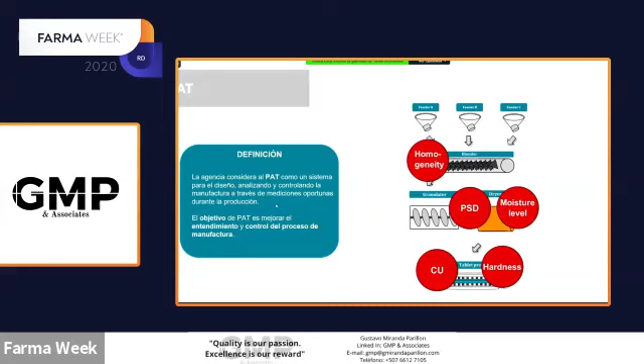So per definition, every single measurement you perform during your process that gives you information about your process and helps you understand it and ensure quality is a PAT measurement. Actually, a simple compression force measurement in a tablet press is already a PAT measurement. It might be an old-fashioned one, but it's a PAT measurement. So PAT doesn't have to be a spectroscopic measurement, but sometimes people think PAT is equal to, for example, near-infrared spectroscopy. Of course, today I will talk about spectroscopy.

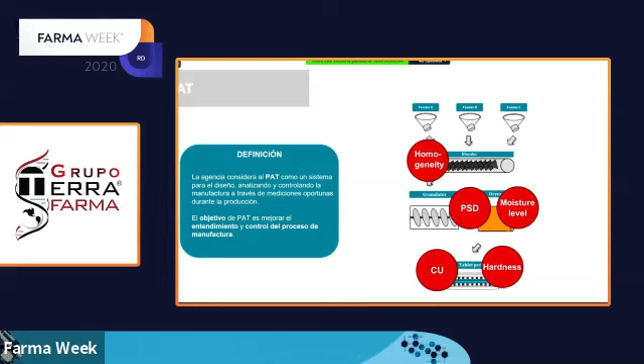On the right side, you see a scheme of, for example, a wet granulation continuous line, and there you see the possible PAT positions. Imagine a line where we have feeders continuously feeding powder into the blender. Then you might be interested in blend uniformity after the blender. When the powder falls into the granulator and is granulated, you might be able to measure particle size distribution.

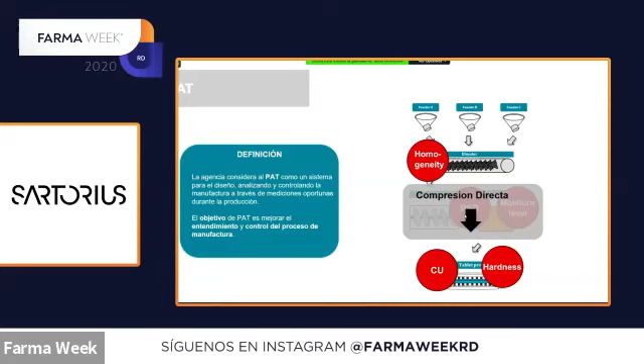Later on, when you dry the powder, you might be interested in the moisture level of this powder. Then the powder falls into the tablet press where you can measure the hardness and the content uniformity. If you would use direct compression, you would save some process steps and of course some PAT measurements, because if no process steps, no PAT measurements needed.

But before we start, I would like to give you some overview about why spectroscopy was actually the method that now starts to be implemented for the PAT methods.

Let's start the other way around. Let's define what are the most important points for a method which we want to apply in a process to measure fast and continuously. So the first thing is we should have a method where we do not need sample preparation. So you don't want to dilute the sample, just measure it like it is.

Then a second point would be that we don't want to have destructive methods, because you want to measure quite often, and if you would destroy your sample, then you cannot sell it. So it should be non-destructive at the end. And then it should be cheap, of course. We don't want to pay a lot.

And this method should give you the possibility to collect, to create some chemical information. So you want to know, for example, is it the right API? So the identification test in my sample, or is the API concentration okay? But on the other hand, it would be great if the same method could deliver you physical information, like, for example, hardness of the tablets. And of course, it has to be fast because we want to measure in a process.

And if we would now summarize all these requirements, the perfect answer to these requirements would be spectroscopy. And this is why PAT and spectroscopy are always so close together.

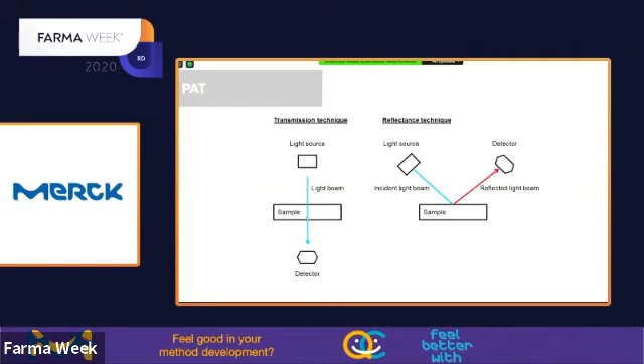Transmission technique is you have the light source and you have a detector and the light goes through the sample. So we measure quite a big section of a sample, but you can already see the light has to go through the sample. So if we are restricted in the thickness of the sample, for example, for tablets, the restriction would be somewhere around 9 up to 10 millimeters thickness for NIR spectroscopy. But we can measure quite low API concentration with this method.

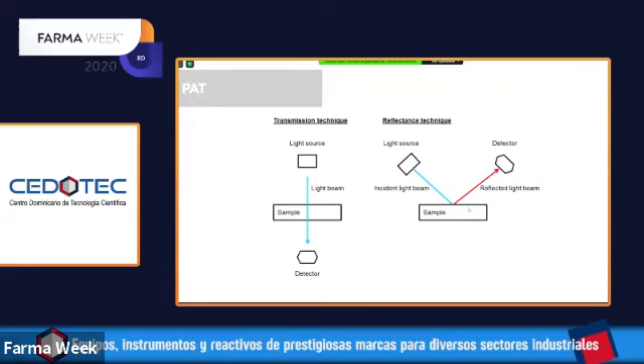The second method would be reflectance technique. Then the light beam and the detector are on the same side. So we are not restricted to the sample thickness anymore, but we measure only a small fraction of the sample. For most of the methods, we can only say it's only a surface method.

But this method is less critical to geometrical shapes. So if you maybe have convex tablets, or if you have a breaking line embossing, this method might be easier to apply. And this method is also better for moving samples. So you see, there's actually no single best method. It's always depending on what you're searching for and what problem you want to solve. Then either the one or the other method might be better for you.

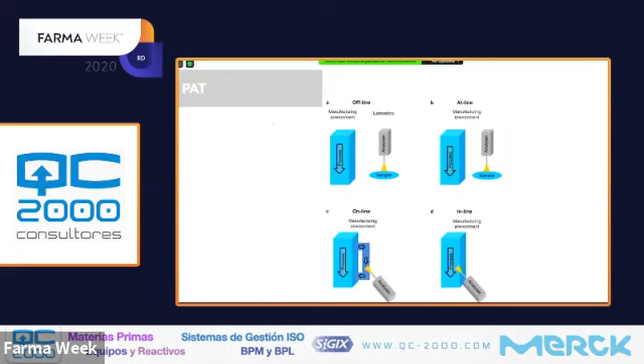So, the last topic from background and basics in PAT is also, when you talk to people, they like to use fancy words like offline measurement, inline, at-line, but not everybody uses them completely in the right way. So let's just be sure that we are all on the same page.

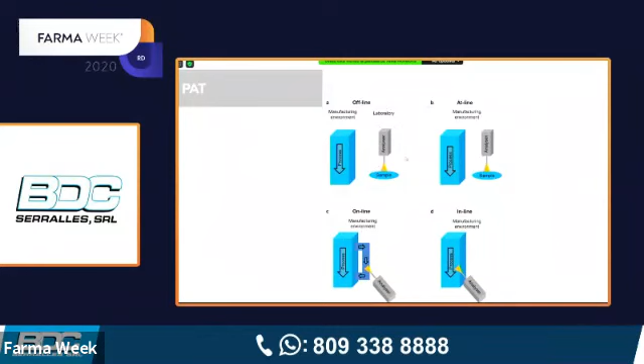Offline means that we have our process in one room, and then we have a separate room, for example a laboratory, where the analysis is performed. So these two processes are spatially separated. This is called offline. If your process and your analysis are in the same room, they don't have to be connected, but they can be, then it's called at-line analysis.

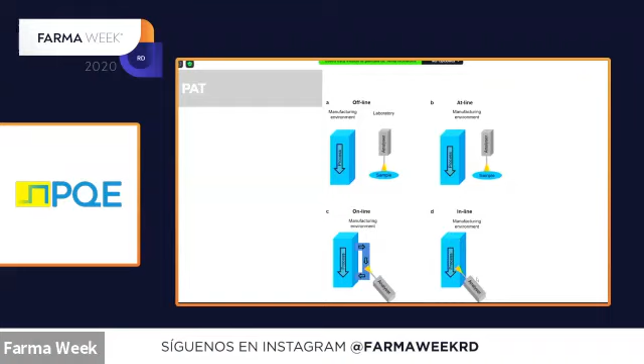Online analysis is when you have your process and then you have kind of a sampling loop where you withdraw the sample, pass the sample through the analyzer, and go back to the process. Then it's called online. And inline is when you have an analyzer directly in your process, so you're not taking the samples out of the process.

Before I introduce our PAT projects, I would like to show you our continuous manufacturing line, because this is the line I'm working with and where we perform most of our trials, so you can better understand the setup. Before we go into this line, I would like to present why continuous manufacturing is now starting to get more and more interesting, mainly because of the motivators and drivers I would like to present now.

First of all, it's time to market. You can save time during the process development phase, because in a continuous line, you can vary the parameters. You can change the blending parameter and directly see what is the influence on the tableting. So you save time, you are more flexible.

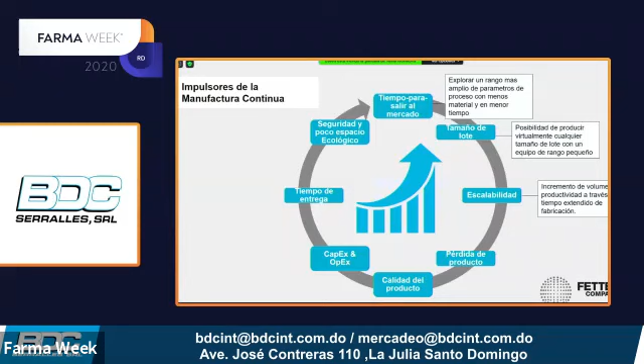The second point would be batch size. You are not restricted to some equipment size anymore, like in a batch production, where you have one big blender and if you want to produce a smaller batch, you need a smaller blender. You just keep it like that, and if you want a bigger batch, you just run for longer, maybe 20 or 30 minutes longer. Then, the scale-up process: you develop the process on the same line, and you can also produce later on the same line. So the scale-up process that you normally have in batch equipment, when you start with a smaller tablet press and have to scale up to a bigger tablet press, may disappear. This can save you up to 6 months.

The next point is, of course, product losses, because a continuous line can run for quite some long time. The only points where you can lose product are during the startup phase and stop phase. But you use the same powder during the startup for all the unit ops, so you would save product, and when the line is in steady state, it is running normally.

Additionally, your quality can increase, because you can control your process in much tighter limits than in batch production. If something is wrong, you can still adjust the process and go back into the tighter limits, and therefore your product quality, due to PAT and maybe advanced predictive control, so-called APC, might be much higher.

Then, of course, your CapEx and OpEx costs might be reduced, because you don't need to buy more equipment anymore. You don't need to buy several blenders to be flexible in batch size. You just buy one line and try to realize all your capabilities with it. Because you don't have the intermediate product in between, you don't need place to store it, so you can save storage space.

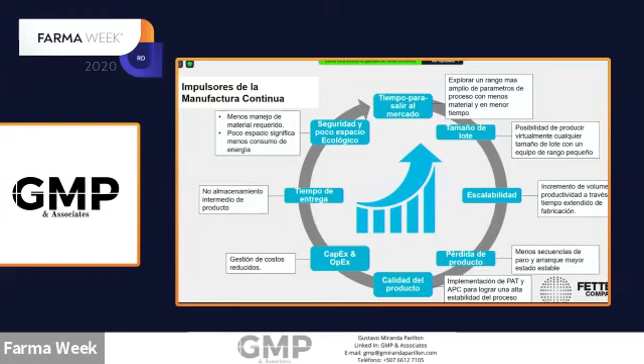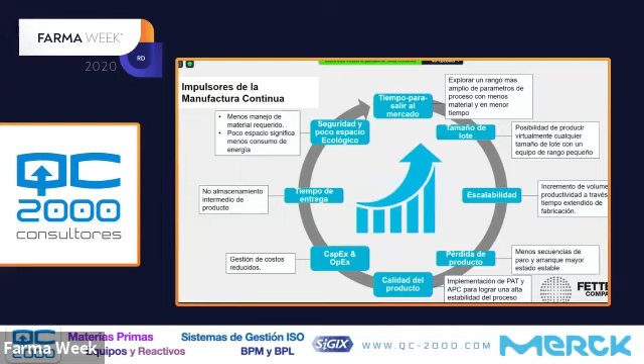Additionally, there's the so-called safety and ecological footprint for the operators — they have much less contact with powders, so it's safer for them. These continuous lines are also quite small compared to huge batch production halls, so you really save footprint. And because it's smaller equipment, you need less energy and less water to clean it, so your ecological footprint might also be smaller with a continuous line.

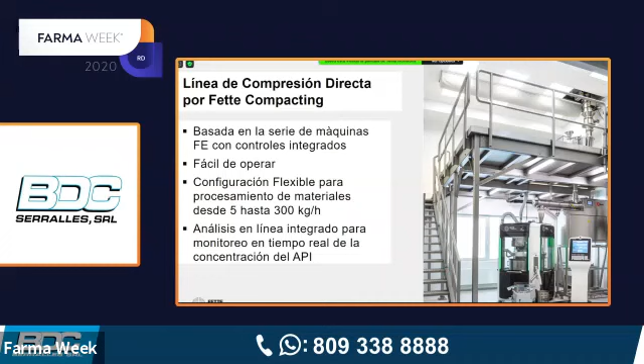Now this is our continuous line from our testing facility in Schwarzenbek, Germany, and that's a high throughput line. What you see in the picture — we also have different lines, but this setup is for high throughput — has a two-level concept where we have the raw material charging, then the feeders on the second level, which we'll also see a bit better in a video I'll show you soon. Then the powder falls into the blender, and after it's blended, it goes into the tablet press, is tableted, and goes to peripheral equipment.

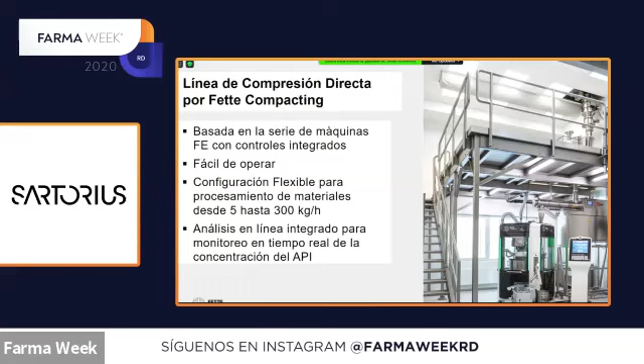This continuous line is completely built on a FETTE controller, so the operator who is operating a FETTE tablet press knows how to operate the continuous line, because there is the same logic behind it, and therefore it's easy to operate. This line can run from 5 to 300 kgs per hour — you will see today case studies for the whole range. And we have several PAT techniques on this line to monitor the API concentration.

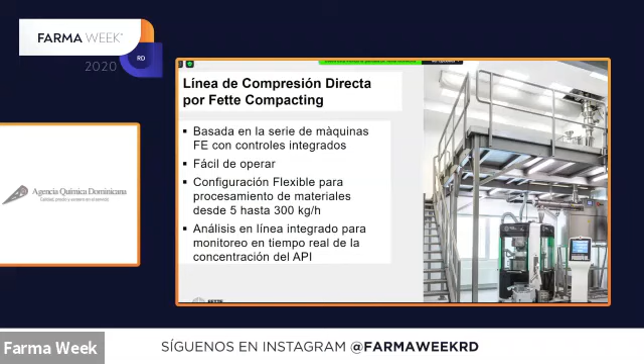Now I would say, let's start with the fun — let's really look into the PAT techniques. What I want to present you today is not a FETTE PAT portfolio, no. It's what we are doing in research at the moment. These are the projects that we are realizing together with customers; some of them are already realized, some of these projects we're still working on with the customers.

We don't have a complete solution for PAT problems, but I want to share our experience, because we've collected some experience, and maybe we can have an interesting discussion. What is your point of view on several implementation positions?

Yes, and since we're at FETTE, the implementation positions are mostly located in a tablet press. It's not only a continuous technology, so you can apply them in the same way in a tablet press.

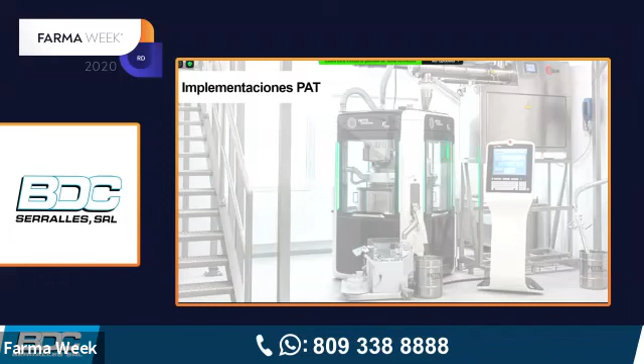But I'd suggest we just follow the powder stream. We see our blender in the background, and then the powder falls into the tablet press. Let's follow the powder stream. Now the first powder arrives at the tablet press, and it arrives at the infeed tube.

There you can see we are directly below the powder level, and here the powder is moving slowly. So this position is quite good for slow measurement techniques. You can of course apply near infrared spectroscopy, but sometimes you may want to apply Raman spectroscopy.

Raman spectroscopy might be more precise, so you might be able to measure lower API concentration. This position might be good for the Raman technique. This is also a sensor you can see in the picture, but it might also be suitable for laser-induced fluorescence.

We've already had discussions with our customers and also tested several spectroscopic techniques in this position. We're sitting here directly underneath the powder level, so it's easy here to also monitor the blending process, because it's a really freshly prepared blend where you can see that.

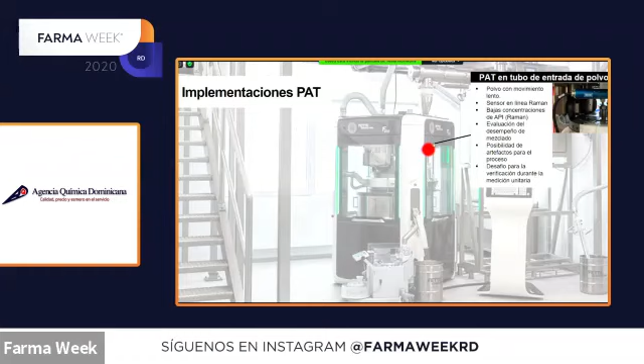If you get a bad measurement here, you always have the question of what to do with it. Of course you can reject the powder, but then you need so-called residence time distribution models, or RTD models. You need a model to know when this powder comes out as a tablet.

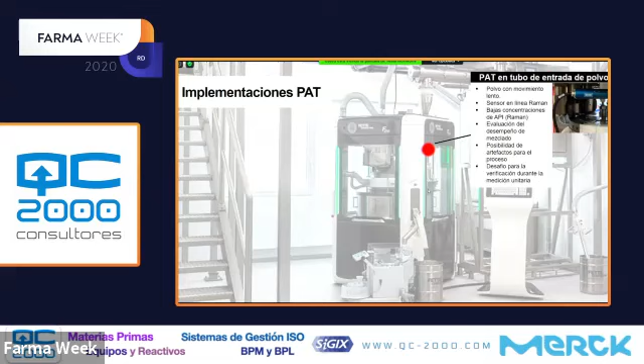But of course you can have some kind of diverter. There are also some companies measuring directly after the blender, before the tablet press. But we don't believe in this philosophy, because in a continuous line you don't want to stop the tablet press. The tablet press should run, actually the whole continuous line should run. If you stop one of the units, you might already be a bit out of steady state.

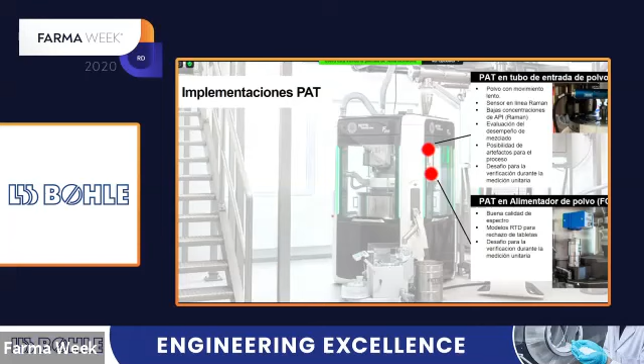Now if we follow the powder, we are in our feed frame, the Fillomatic, which is our 3-chamber Fillomatic. Now you can see we are in the second chamber, in a filling chamber. There you see an NIR sensor, which is measuring directly in contact with powder, and this is the powder falling into the die afterwards.

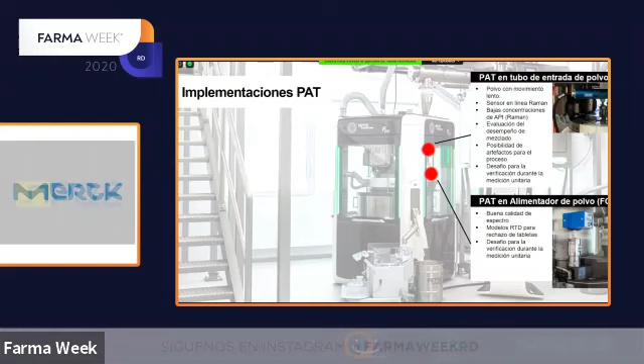In this position we have really great spectroscopic quality. We haven't experienced any sticking of the product to the sensor. You have the same, I'd say not an issue but a challenge, as with the position above: if you have a bad measurement, you need RTD models, residence time distribution models, to be

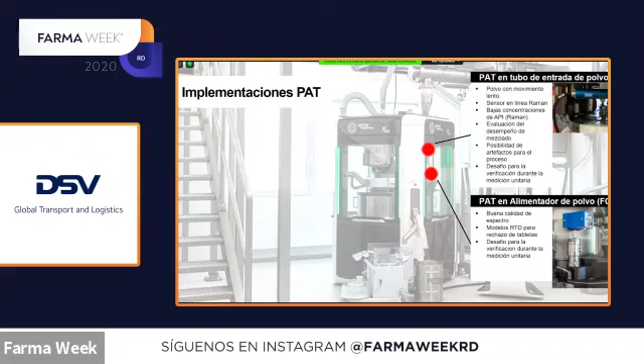able to know when this powder is in a tablet, in order to reject it, and also to verify this measurement. If you have a bad measurement, which might be due to spectroscopic issues, like air in front, an air bubble, anyhow, you would never be able to collect exactly this powder and measure that.

Now we're getting further. The powder was compressed, and now the upper punches are going up, and the tablet is still in the die. Before the tablet gets ejected, there is a sensor that sits above the tablet. You have to understand that the tablet press is actually a perfect sampling device for PAT, because it presents a tablet always exactly in the same way, at the same distance to the sensor.

The tablets have the same hardness, so the samples have the same hardness. Therefore, in this position we have a really good signal to noise ratio, and we can do 100% measurement control, measuring every single tablet.

And if the tablet is bad, we can reject it. So we can do single tablet rejection, take this particular tablet and go into the lab to do maybe a verification HPLC analysis. We can really align this reference analysis value with our spectra, because we know exactly which single spectrum belongs to each tablet.

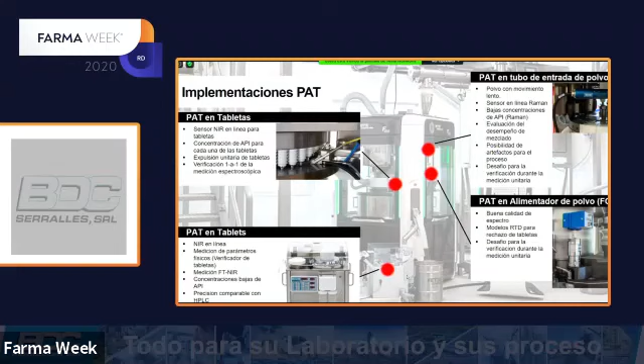And the last position is now the tablets are out of the tablet press, and they're falling into the NIR Checkmaster. The NIR Checkmaster is now really a product of FETTE, so this one you can buy.

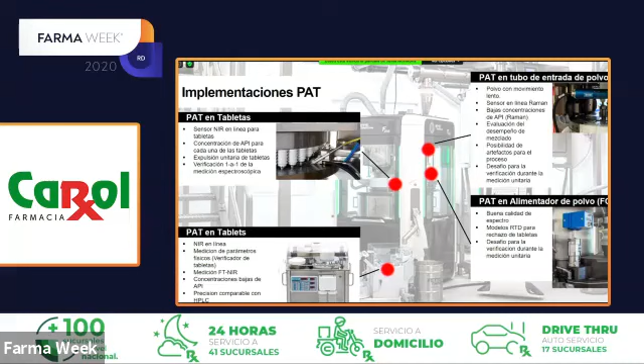The NIR Checkmaster is a tablet tester where you can check all the physical parameters, like what you know from a tablet tester: diameter, hardness, length, breaking strength, and also the thickness of a tablet. But it also has an additional NIR device.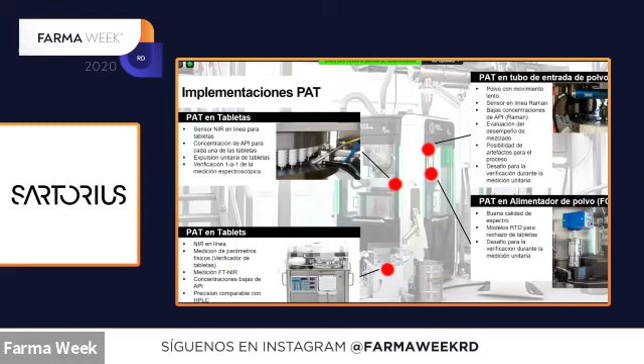I will show you that a bit more extensively on some slides later. And this NIR device is really precise, because here now we have time. We are not so time critical like in the positions I showed you before, because the longest measurement here is always a hardness measurement, so we can take time. Therefore, an FT-NIR is installed in this position.

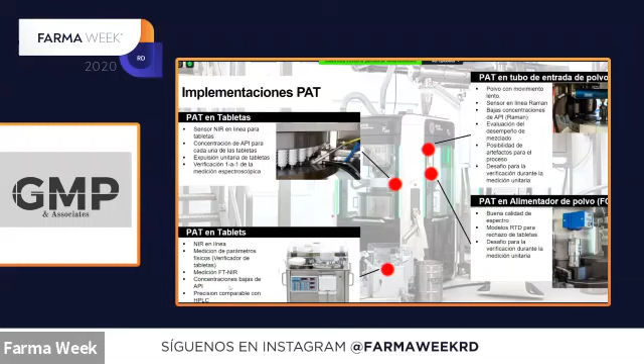This is a quite precise NIR device, which allows us to measure really low API concentrations. I will show you a study later on. A company, not even ourselves, measured this and said that this device can achieve the same accuracy as HPLC, because we have a hardness measurement, tablet weight measurement, and also API concentration measurement due to NIR.

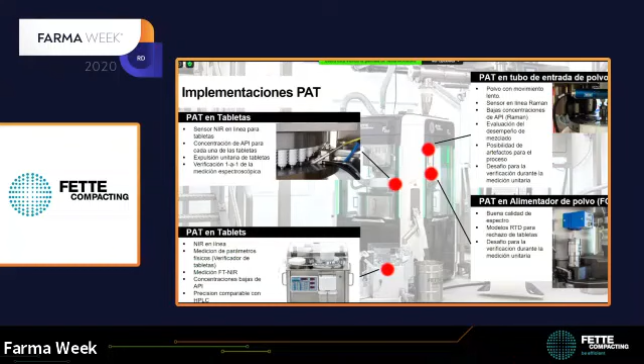We can measure content uniformity, and we also consider this device the easiest device to start with real-time release, if for example our customers are not really into PAT yet, because this device is already fully integrated into FETTE systems. So you will not get a scary spectroscopic screen in production, though you would in a development mode. The operator just operates a FETTE tablet press and operates an NIR Checkmaster through the FETTE software. It's easy and robust.

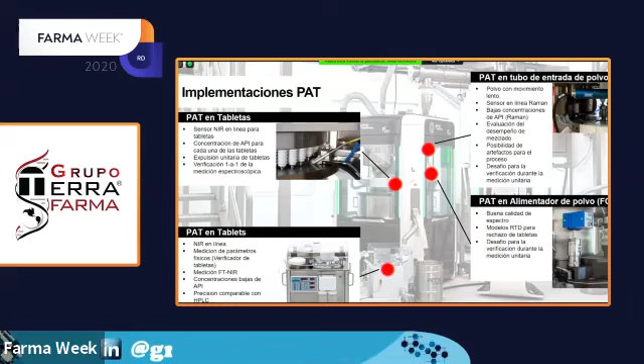So in the next step, I would like to show you a video of our continuous line. I just would like to show you the video because there you can see some of those PAT tools in action, and I think that might help make it more interactive since I cannot show it to you in person. So let's start with the video.

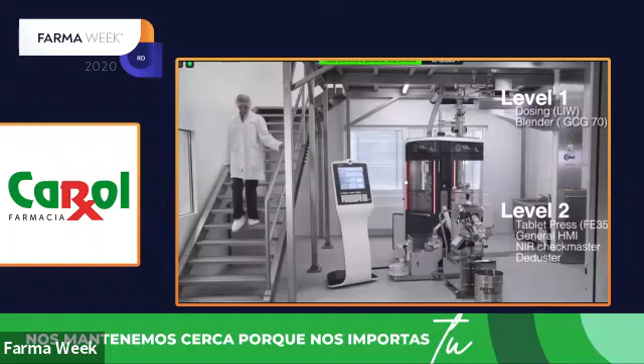Yeah, it's running. So it's our direct compression line, it's our testing facility. It's actually me several years ago. And this is a two-level technique.

This is now, you see, our HMI for this line. It's an older one, so I think it's 2 or 3 years ago. Now it looks a bit more fancy, but all the things that you need are here. You have an HMI to run the feeders, blender, tablet press, and also the PAT tools. And if you like, you have access to all the parameters of every single component, so you can adjust the parameters really in detail.

So now you see the feeder level, and you will see now that the powders will be filled in. This is a level I was not able to show you on the picture before. You see there's one feeder, and you see the second feeder. So the powder is now moving and dosing into the blender, and now you see that the blender is also already running.

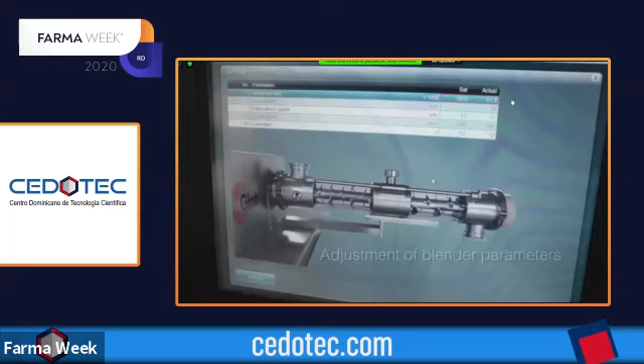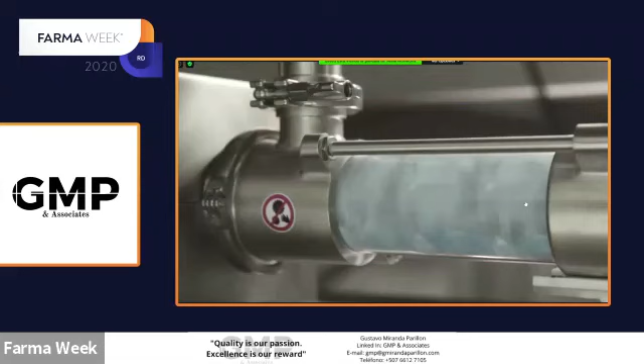Now you see the PAT tool, this is the first sensor. At that time point, we measured blend uniformity in the blender. But now, with our experience, I would not recommend you this position, because you will see in a minute there's a lot of things happening. So you see that the powder is blending.

So you can imagine this is an NIR spectrum. You can see the blend uniformity and follow the NIR spectrum. But you see that a lot of things are happening in front of the sensor, and therefore the spectra are really noisy, and the blend is not finished. There are still 1 or 2 screws in the blender later on where the blend is still being blended. So I would really recommend you to measure after the blender.

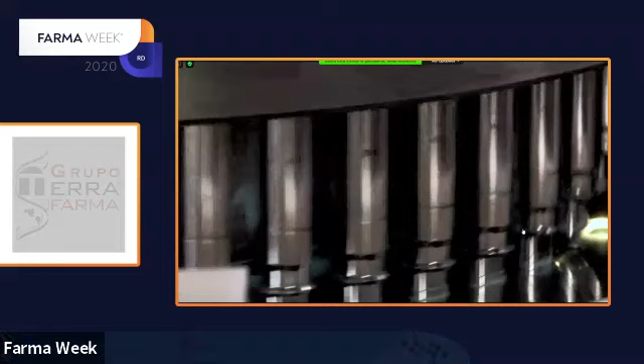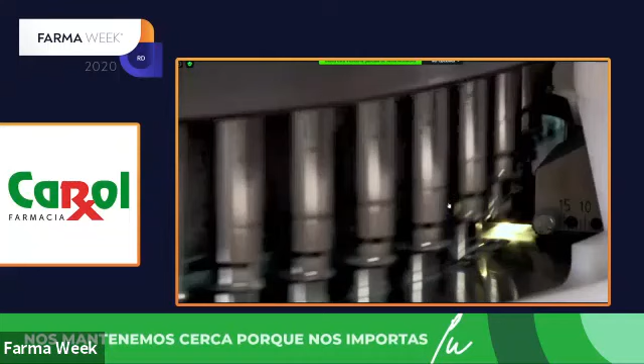Now we're already on a tablet press, and the tablets are already tableted. Now you see the NIR sensor, which sits between the tablets, and you see how fast the tablet press is running. Now I will just unmount the sensor, and you see that we also have some cleaning concept tubes. I'll explain that also later on. That's really important because we're in a dusty environment. If you would not have a cleaning concept, you will have a dirty sensor, which will show you nothing.

That's our old screen. Now it's a bit more fancy in FETTE colors, where you see that you get a dot for every single measurement, and then you see the edges. If you're in a green zone, then the operator knows that everything is okay. And if you're outside, then it's yellow and red at some point.

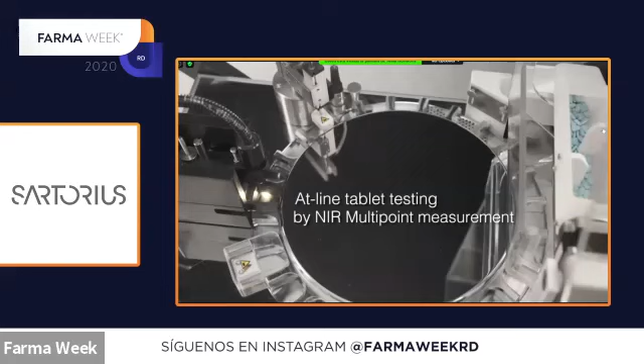And we also have an at-line tester, that's one of our NIR check masters. You see that there are some tablets now going into the tablet tester, and they're tested at single positions. And now you see the NIR measurement in position, how the sensor is moving and scanning the tablet for the measurement.

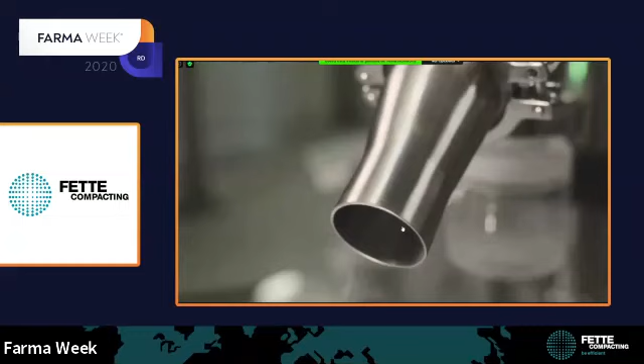So, as I said, I wanted to show you this video just to show you some of the NIR positions and maybe make it a bit more interactive, so you have a better feeling for what I'm talking about today. So this is just the video. I will wait for 10 seconds and you will see a beautiful FETTE logo and produced tablets.

No FETTE logo. Just let's go to the next slide.

Now when we have discussions with our customers, we talk to customers who are at different stages of PAT. Some of them already know what to do, they don't need us, they just want to buy a unit and do everything on their own. And then we have a lot of customers who are new to PAT and they are searching for a strong collaboration partner. With these customers, we always tell them that you should not expect too much from PAT from the beginning. That's why this talk is called The Road to Real-Time Release.

We always recommend to start slow, because PAT might be a new device for you. The first step would actually be process understanding and trust in your quality, because you have never measured your process so frequently. So you actually don't know what's going on in your process, and now, surprise, you may have some variations you never expected. So take your time to learn and to trust your PAT and also to trust your process.

Then the second step would be, okay, now you're trusting your process, you're trusting your PAT tools, start with process optimization. So start maybe to react on the process, or to stop your process if you see the batch is bad, and maybe you have to reblend, whatever.

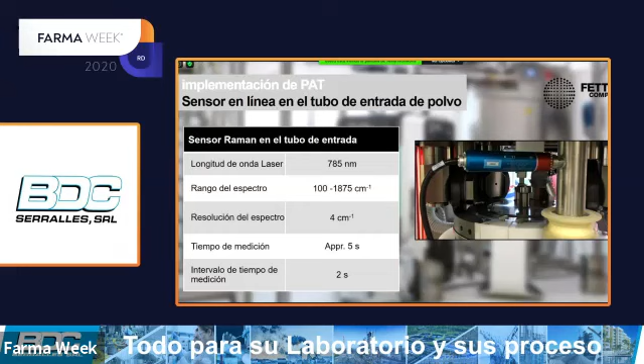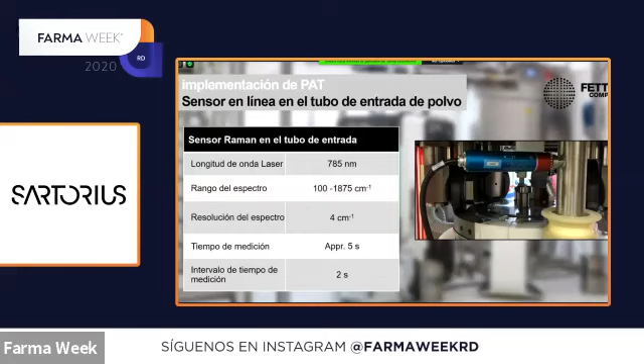When I'm talking about low concentration, I think I will repeat it several times today, but normally you say that NIR works until 1% in a process. But I would say actually it works only up to 5%. So above 5%, I'm quite sure, if you don't have a quite fancy API, it will work. But if it's between 5 and 1%, I would always recommend to test, to do some feasibility studies. And below 1%, most probably in a process, no chance.

But with Raman, you can go much, much lower. I will present you a study in a second for low API concentration. And here you see some technical data.

Let's just focus on the most important points. This is quite a slow method, we need 5 seconds per measurement. Of course it's completely product dependent and also supplier dependent, so it might be faster or slower depending on your Raman supplier. Then the sensor needs 2 seconds until it can perform the next measurement, so that's for you to know how often you can measure.

In this case study, I will always present you what the setup was. Here we have a target API concentration of 0.3% to do the calibration model. Quite often when performing feasibility studies with a customer, we have blends of different concentrations, and we measure them on our continuous line together with our PAT tools and with the customer. Then we create a calibration model, put it on the continuous line, and start to play by varying different parameters to see if we are capable with PAT to really see differences and variations in the process. First, I would like to present you a model.

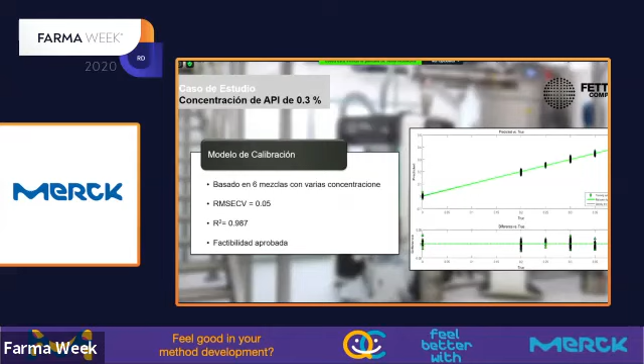To be able to use PAT, you always have to train the sensor. You have to say to the sensor that the spectrum, for example, belongs to 10% of API. So you have to have calibration blends with different API concentrations, collect the spectra, verify the measurement by maybe HPLC, or if you do it quick and dirty, just assume that you have 10% in a blend. But what you always see is the calibration curve.

You would always see the predicted values - the values measured by the spectroscopic technique - against the true or reference values. This is either the reference method measured API concentration, or for example the label claim of the blend. Then we always look at some characteristics of the model.

For example, its root mean square error of cross validation - it's actually an error of your model. In this case it was 0.05%. And the R square, that's how straight your line is, how good the prediction is. You see that these values are quite great, but I will also say something about how to evaluate them later on. For this product, we actually proved the feasibility.

And after the annoying part, the fun part starts. We use this model now on our continuous manufacturing line and run this product. Now we want to see what happens if we start to play around and make mistakes. You see that the line was in steady state after 10 minutes.

Wait a second, I have to see - my slides are in Spanish, and sometimes I'm a bit confused about what's actually on the slides.

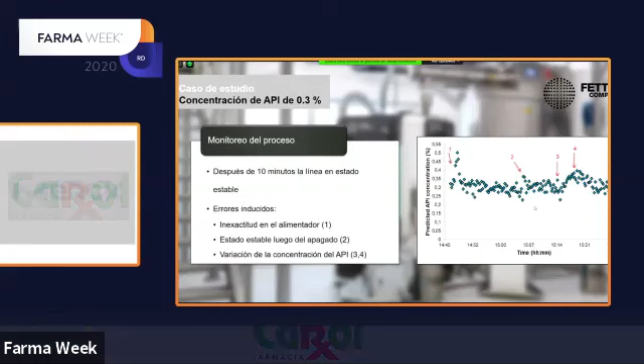Then we were running for some minutes, and then we stopped the line. I already said continuous lines don't like it if you stop and start them again, so don't do that. But we started the line again, and you see that during this process we were a bit out of spec, a bit off steady state, and then we were in steady state again.

Then we decided, because it's a continuous line, just increase the API concentration - so we went from 0.3 to 0.38. You see that after some time the concentration changed, and how fast it changed. Then we decided, boring stuff, let's go back to 0.3 API concentration, and you see that the concentration went back. This shows that the model was able to follow all our crazy changes during the process.

So let's now go to the next position. This is our PAT in a feed frame. Once again, let's have a bit closer look at the sensor.

You've seen already that the sensor is sitting in a second chamber, and it is really in direct contact. We also have a micrometer screw here, so we can insert the sensor more or less into the feed frame. This might be useful because, based on our experience, depending on powder flowability and which Fill-o-Matic wheels are installed, it might be necessary to change the insertion depth of the sensor.

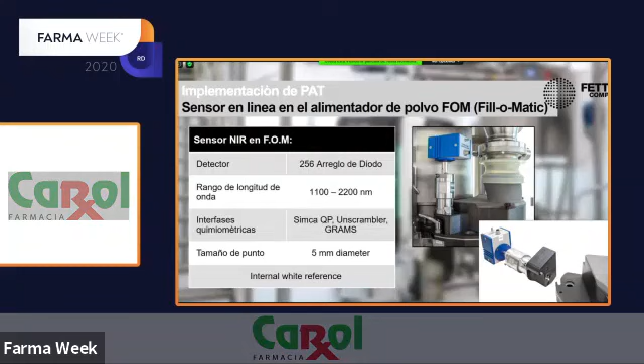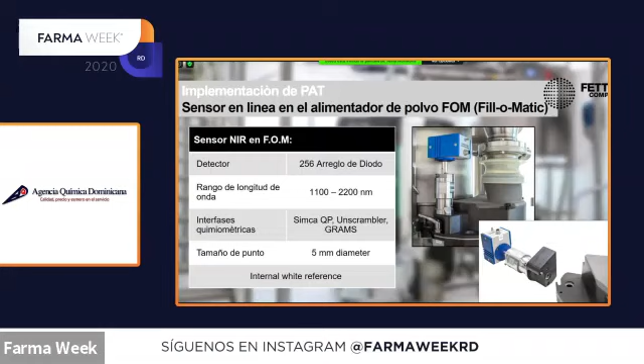Let's now look just at the technical reasons. It's a so-called diode array detector, a fast technique. So if you want to use NIR in a process, most probably you will end up with this technique. The wavelength area here is the so-called extended NIR area. NIR range normally starts at 800 nanometers and goes up to 2,200 nanometers. The first range is a normal NIR range, and the second range is an extended range. This sensor is working in the extended range.

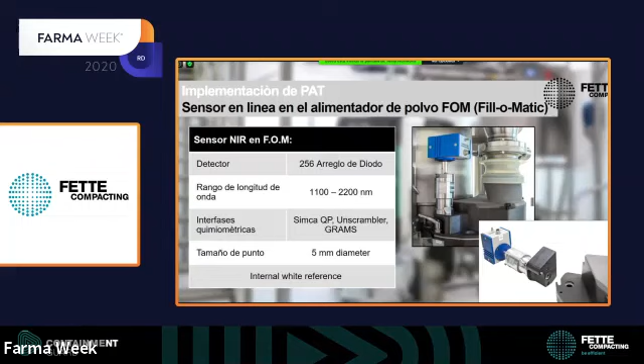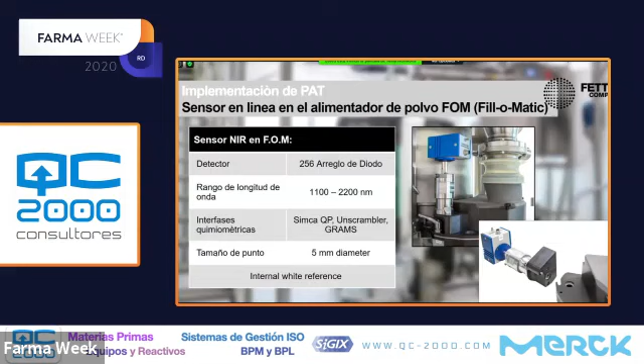Honestly, my personal opinion is it doesn't matter which range you're using, because the NIR technique and the APIs we use don't have really precise peaks, at least in oral solid dosage forms, not such precise peaks that you really need a special range for that, at least based on our experience until that point. But if you're coming from a different area, not from OSDs, then it's really interesting for you. In this extended range for this sensor, a lot of specific peaks for special APIs can be found. If you go to a normal range, you maybe will have fewer peaks, but you would have a good signal-to-noise ratio. As I said, from my personal point of view, you can always use both - it just depends on what your target is.

So now you know already the game - the calibration model for the feasibility study. You see this time the model is based on 5 API concentrations. Root mean square error of validation in this case is 0.34%, which is quite good, R squared, and we have 2 latent variables.

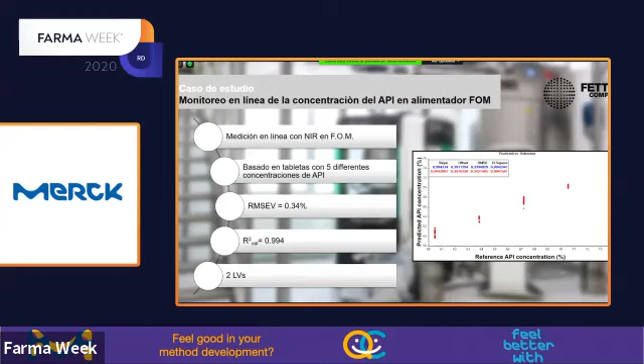I would like to tell you something about these values. Everybody likes to discuss about these values, and agencies want to see these values too. But my personal recommendation is don't try to get these values as low as possible, because if you try to get them as low as possible, at some point you can lose robustness. NIR sees everything - it's able to react to changes of your particle size, for example, of your raw material ingredients. NIR is able to react if you change the humidity of your raw materials, if the temperature changes, but you don't want these parameters to influence your prediction, your measurement of the API concentration.

So they should not be included in your measurement. Therefore, sometimes it's better to have a more robust, maybe not so precise, model. What I'm talking about is when you do a model, really pay attention to what the model is reacting to, and maybe do not try to include everything, because all values are actually correlating with each other. Maybe try to include fewer latent variables - this number should actually be as low as possible. Try to include as low an amount of latent variables as possible to have a good model.

And now you have the model, once again, predicted API concentration against reference API concentration. If you see these models, it's always important to see that you have a straight line - that's good for linear correlation - and that your dots are not varying too much around the target concentration.

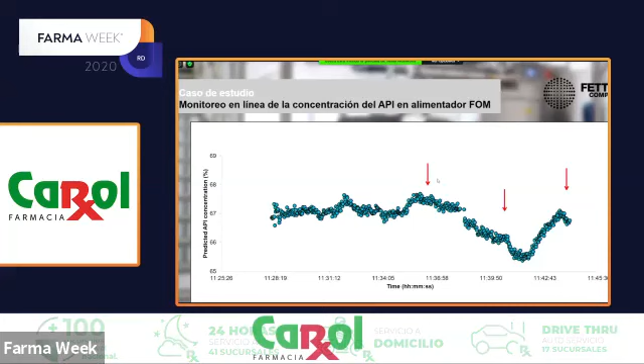And our most fun part that we really like is to change the API concentration. So we went to 65.5% of API at the time point of the red arrow. And then you see that the concentration dropped. And then we actually thought, okay, it's already there, so we went up again, but it was not there. So the concentration dropped for some time again. And then it went back to a steady state, and then we stopped the line.

This is also the diode array technique, so it's because it has to be fast. This sensor can be bought in a full range, so it can cover standard and extended range at the same time, but it can be also bought for one of the two ranges.

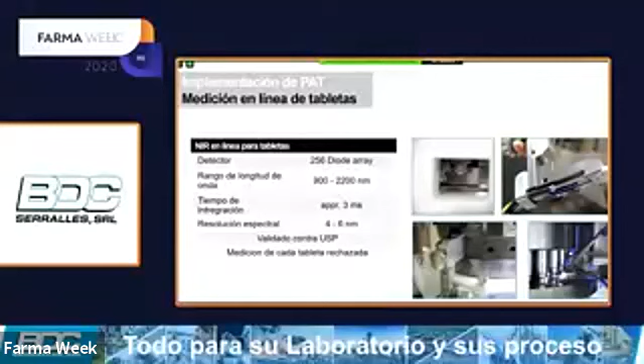Personally, I would always recommend for this sensor to take a standard NIR range, so something from 900 up to 1,700 or something, because there you have a higher light intensity. This technique has a better signal-to-noise ratio. And you can imagine, such a tablet press can be really fast.

And this sensor has no speed limitations, but it might have spectroscopic speed limitations, because at some point you have really maybe just 1, 2, or 3 milliseconds to measure. So 3 milliseconds, actually the whole range is comfortable, we can measure with the whole range. But if you are really running full speed on a fully equipped huge tablet press, it might be more reasonable for you to go to a normal NIR range, because here every millisecond counts.

It has a high spectral resolution. It's validated against USP, and there's the last point: we measure every single tablet, as I told you.

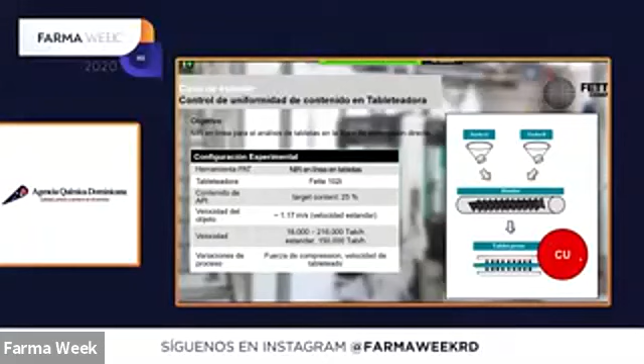Now let's see some case studies. These case studies were performed by a university, and this is an NIR sensor which was located on our small tablet press, a FETTE 102i. It was on a continuous line, and the API concentration was 25%. They used the full speed of the tablet, so the whole range of the compression speed, to see if the sensor is suitable to measure. And they changed the compression force and the tableting speed.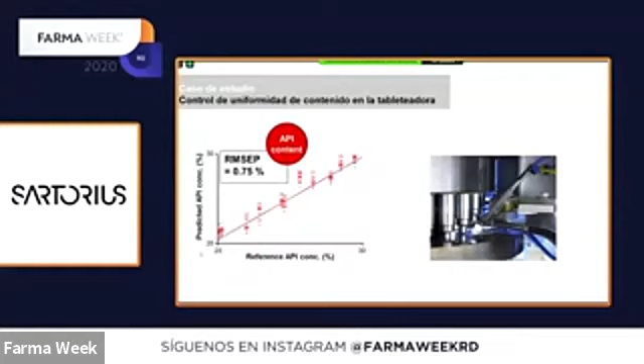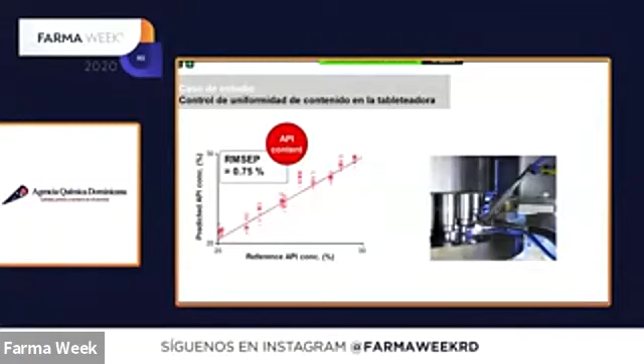And this is a model. So we have predicted API concentration against a reference API concentration with a root mean square error of prediction of 0.75. Maybe a short comment: I'm talking a lot about root mean square errors, and there's always a different letter behind, but it's mostly about how these values were verified, which validation method was used, whether a test set was used.

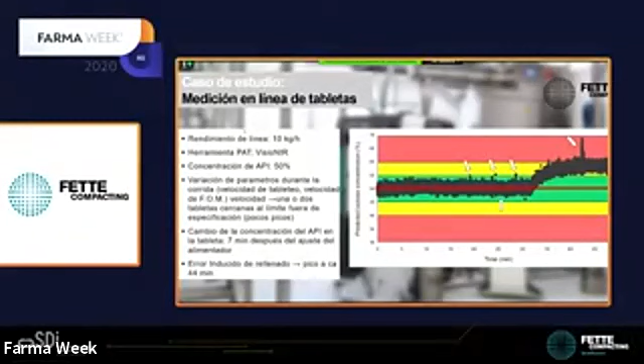This is the model. And what I'd like to show you now is an additional study performed with lactose as a model API. This study was actually performed during a customer event, so the customer was playing on the continuous line, adjusting the parameters, and we were just looking at what happens. The line was running at 10 kg, and the API, in this case lactose concentration, was at 50%.

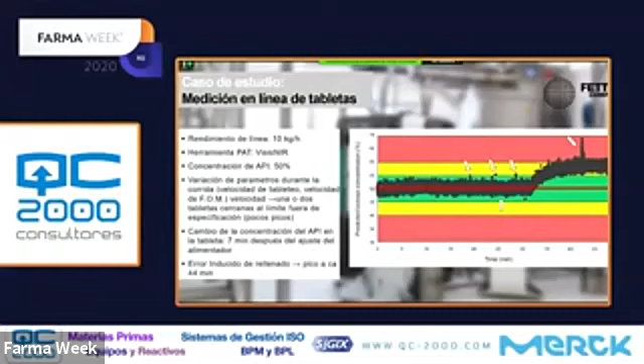We varied several parameters. In the beginning, these are the first arrows, the customer was just changing the tableting speed, the volumetric speed, and then one or two tablets were just different than the others. This is what you can pick up and clearly see with the sensor.

Then after some time, once again our favorite game, we changed the API concentration from 50% to 58%, and you see that after 7 minutes the API concentration increased. Then, my second favorite game, hit the feeder: we actually induced an error to the feeder, and you see that the feeder overreacted for some time, so we had some tablets with too high lactose concentration.

So now we are almost done. My last PAT position that I showed you today was the NIR Checkmaster. Now let's have a more detailed look at this device.

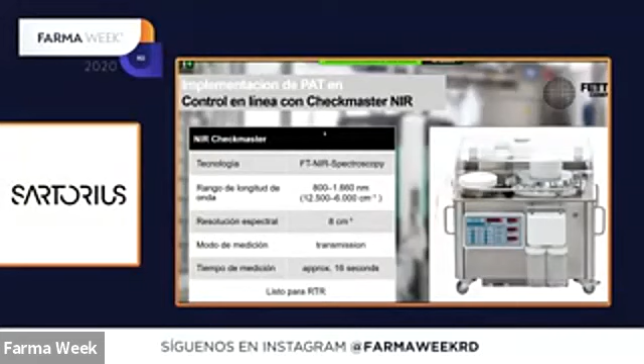As I already said, we have here a really precise NIR device with really high spectral resolution, and it's a transmission device, so we measure through the tablet. The light source is underneath the tablet, the detector is above the tablet. The measurement is quite slow, 16 seconds, but we don't care because the hardness measurement is anyhow slower.

The setup of the study was that we produced tablets on our tablet press in 6 different concentrations. These tablets were later measured with the NIR Checkmaster, and the same tablets were also measured with HPLC.

I'd like to show you now on this page how the NIR measurement is performed. So after the physical measurements are performed, the tablet is grabbed by the holder and it goes into the so-called snap holder. It moves in and then the tablet is snapped by the holder and fixed.

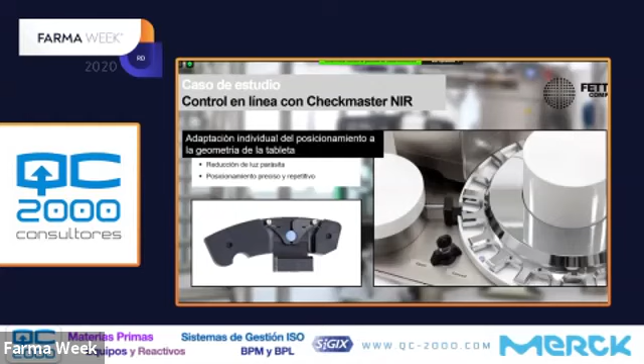As I told you, you may remember in the beginning, transmission is really critical to geometrical shapes, to embossing, so the tablet always has to be positioned exactly the same way. This patented holder makes exact positioning possible, and also allows us to reduce stray light. If you have a tablet in front of the light, the light can easily go around the sides above the tablet, but this light has no information, it will just blind your detector. This holder blocks this stray light so it cannot go around the tablet, the light can only go through the tablet, and that allows a high precision measurement with this device.

And now the study: this is a study we performed with a big pharmaceutical company, published a year ago. I'm not allowed to tell you the exact concentration, so we are talking about concentration levels.

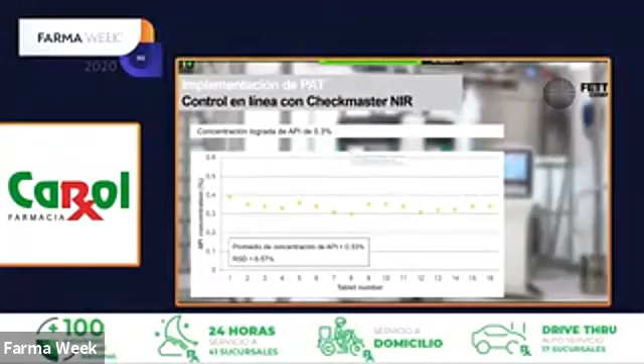in the concentration. So this is once again what I said in the beginning: please don't forget, API content NIR in a process - really measuring in a process, in a powder stream or on a tablet in a process, is more or less up to 5%. But if you have time and a high precision NIR device, then you can get lower, even lower than 1%.

And the last study I would like to introduce is that we use 3 of our sensors - that was the most fun. If we have them, we can also use them. And in this case, it was already quite challenging concentration because we had 3% of the API, and you remember NIR is not below 5% in a process.

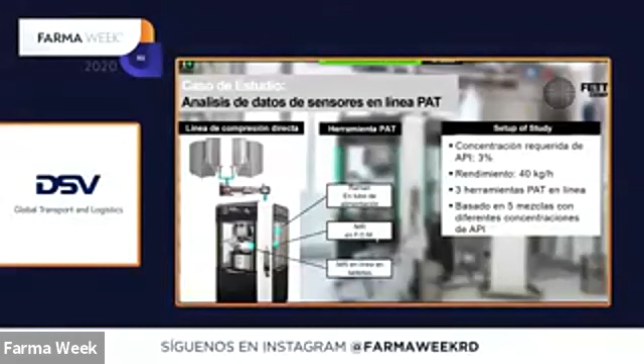So for Raman, easy game - Raman should be able to do that. For NIR, a bit challenging. We had all 3 PAT tools on the line, and we used 5 blends for the concentration, for the calibration model for each sensor. I will skip the models for each sensor, but trust me.

Now let's see the results. So once again, it was performed on a continuous line. We like to challenge the line, so this time we just wanted to do what the line doesn't like: start and stop, start and stop. We performed it several times, several breaks in between, even a bit more. Then we started the line and just wanted to see how the line runs - so the line was out of steady state by doing that.

And then once again you can see that in the visionary, the last NIR sensor on the turret, it's now even more flattened, so the feed frame blended a bit more, but you can still see we still have some single bad measurements - really bad tablets that were rejected in this case. So not everything from this disturbance was evened out, and we were able to pick up these single bad measurements.